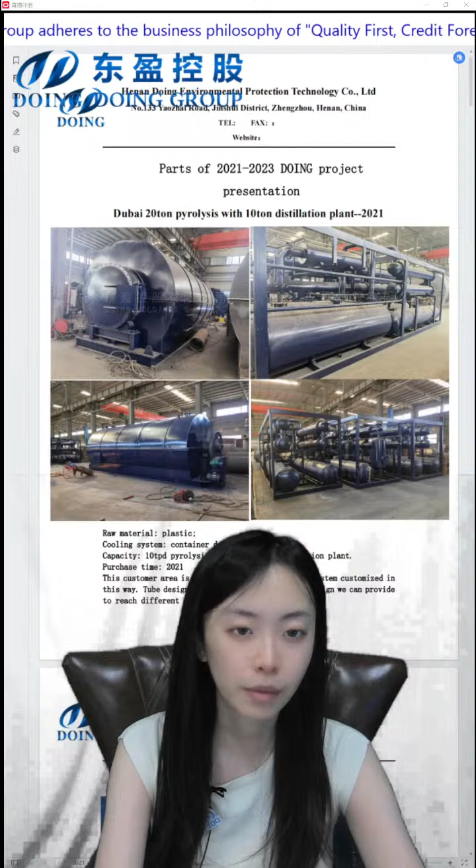The products we can get from these waste materials contain fuel oil, carbon black, or coal powder, aluminium ingot—this kind of products depends on what kind of raw materials you have. For example, if you chose the waste tire, then we can get carbon black, tire fuel oil, and steel wire from it.

The oil yield is almost 40 to 45 percent. This is from the waste tire. If you have tires from cars, trucks, or OTR tires, the oil yield is very high, can reach 45%. But if you choose motorbike, bicycle, or electric bicycle car tires, then the oil yield may be 35 to 40%. This is the oil yield.

We also can get 35% carbon black, 15% steel wire, and 10% syngas—this is the product from the waste tire. If your raw material is waste plastic, then different kinds of plastic give different oil yields. If you have pure plastic like PP, PPS, then the oil yield can reach 90%. But most of this kind of plastic, we don't use to recycle fuel oil—we also use it for deep processing.

But if you chose waste, garbage, daily waste, medical waste, or construction waste, then there are many kinds of plastic in it. So the oil yield is random.

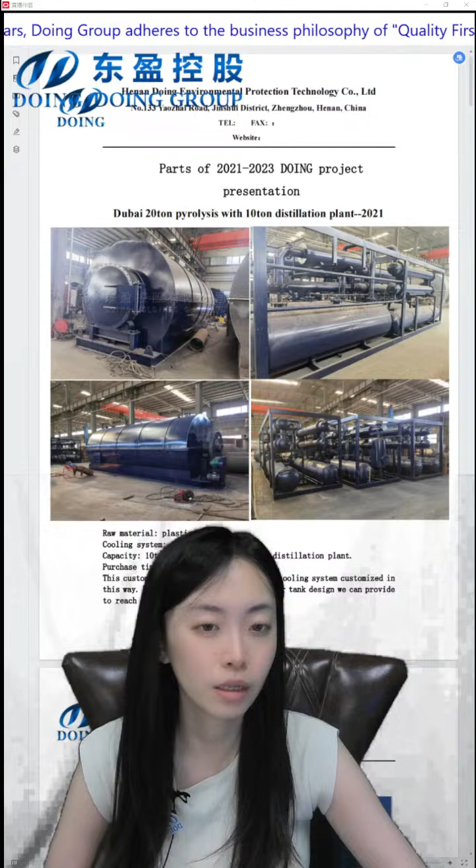About the fully continuous pyrolysis plant, the capacity, the biggest one is 50 ton. Some of our clients that have many varieties of raw material will choose the fully continuous. Another advantage is it can work without stopping for 45 to 60 days. So it has higher efficiency.

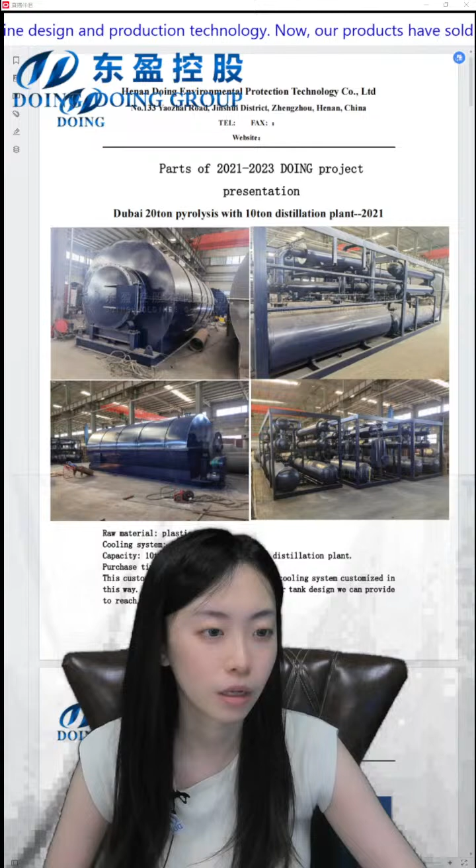It can work 24 hours. It's one of the equipment types that the Chinese government will encourage, so it's a new design this year. If you're interested, you can leave your requirements with us.

Later in this catalog, I will show you information about different customers from different places and what kind of equipment and configurations they chose. Thank you for your like. They have different raw materials, different capacity, and different requirements. Later I will show you one by one.

This shows two kinds of equipment, the batch type and the fully continuous. We also have the semi-continuous pyrolysis plant. The efficiency is between the batch type and the fully continuous. We can get 3 batches for 2 days, and the capacity is also 10 ton, 12 ton, 15 ton, 18 ton, and 20 ton. Most of our clients will choose the 18 ton or 20 ton.

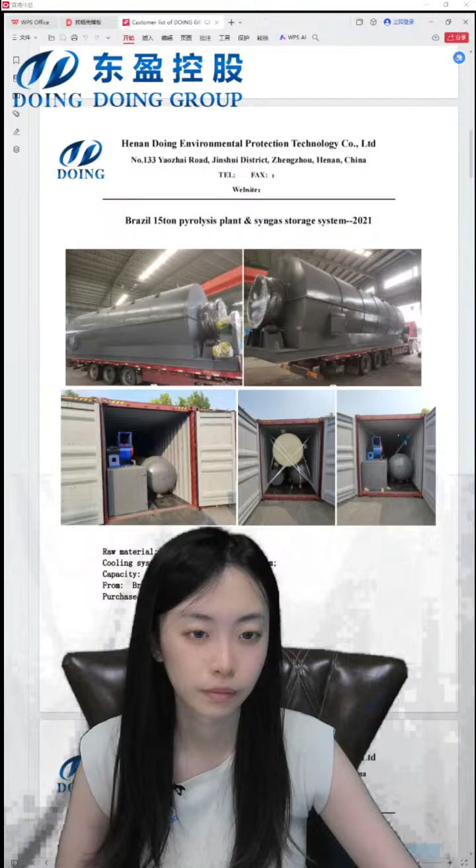This is some information about each customer, and some transaction details. We will give you transaction details, and also our catalog, certificate, and some license that we have. If you are interested, you can just contact with us.

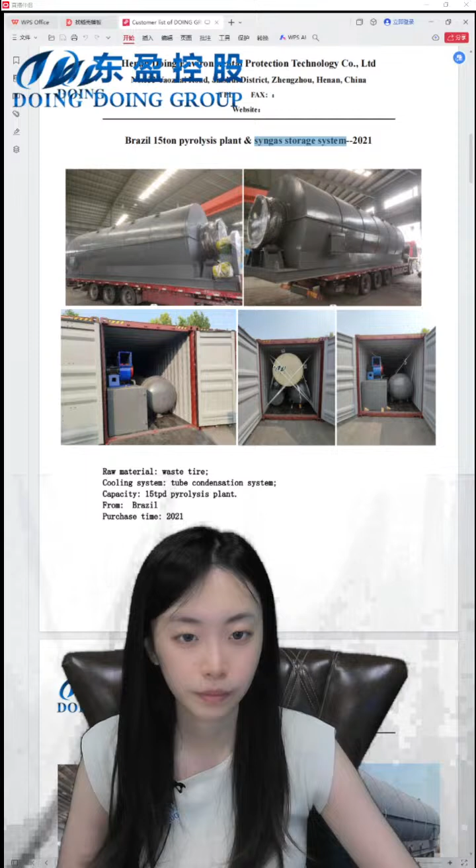This is a customer in Brazil. It shows a 15-ton pyrolysis plant, and it also has a syngas storage system. This customer's raw material is waste tire. The four products it can get are fuel oil, steel wire, carbon black, and syngas. The syngas is a heating energy, which can return to your pyrolysis reactor to heat your raw material, and you can also store it to use at other places. So these are the four products. The fuel oil we can get is 40 to 45%.

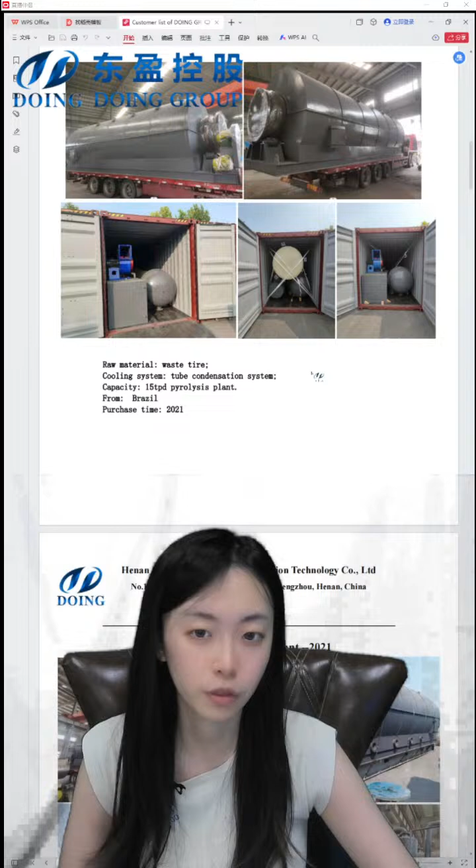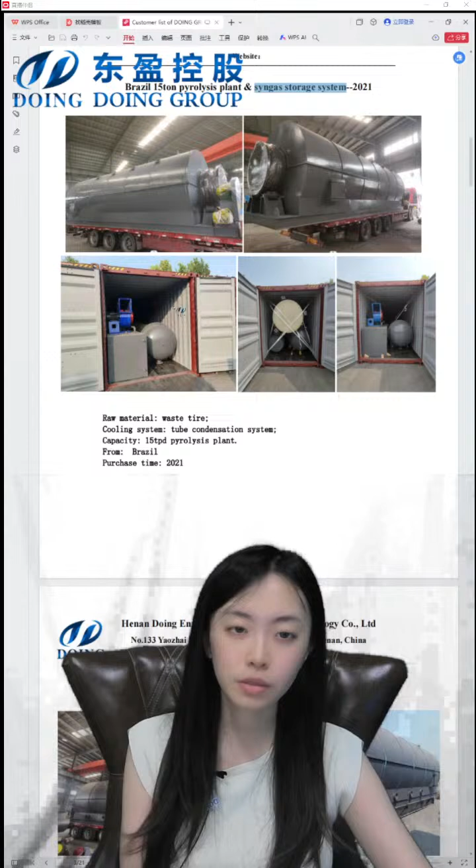The cooling system this customer chose is the tube condensation system. The tube condensation system has 7 condensers for 4 steps. Later I will show you how to condense the oil using this tube condensation system. You can see these are the condensers, the horizontal condensers. They're transported separately, but we can have our manager sent to your factory to help with installation and train your workers.

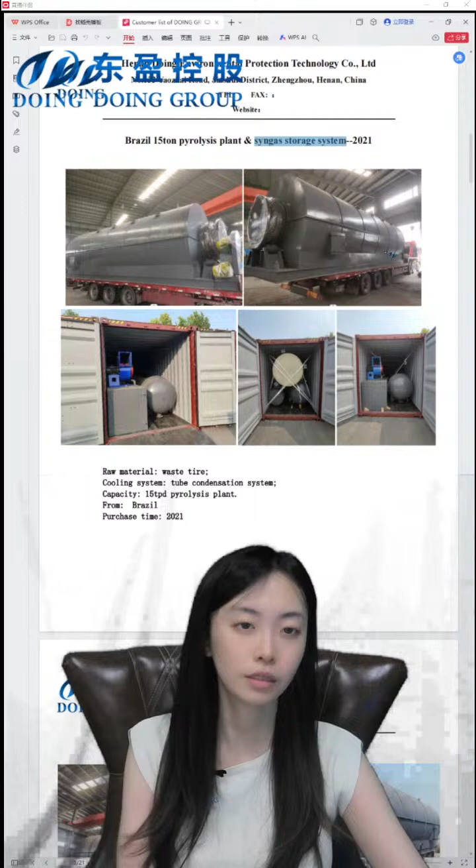This is a 15-ton batch type pyrolysis plant, and it uses side slagging. We have 3 kinds of slagging ways: front slag, side slag, and back slag. You can just give your requirements and we can design for you. They have different advantages and features.

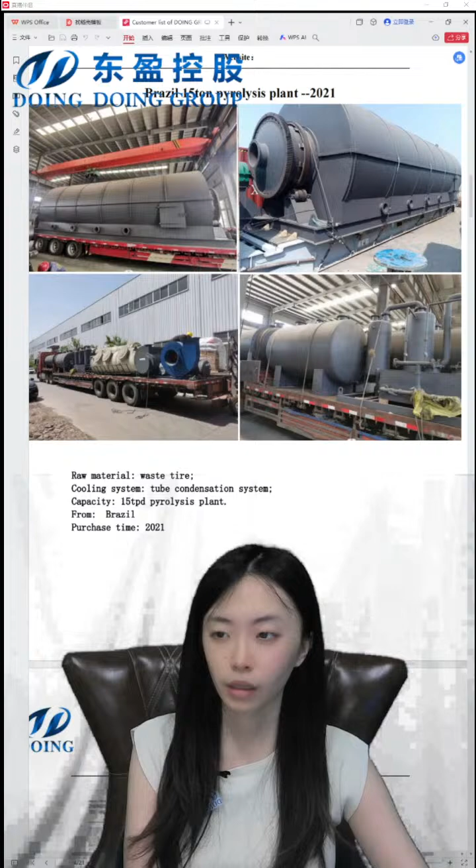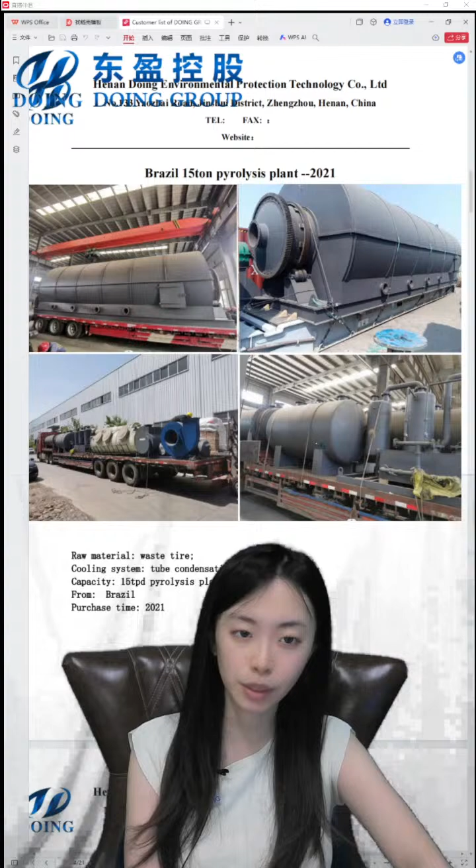Also, this is a customer in Brazil, and the raw material is also waste tire. This is the waste tire pyrolysis plant. This is the outlet - the gas will come out from here and go to the condensation system. Here is the oil tank for 2 tons to store the oil temporarily. Here is the odor removal system.

Some license information - if you want this information, you can contact with us and we will send it privately.

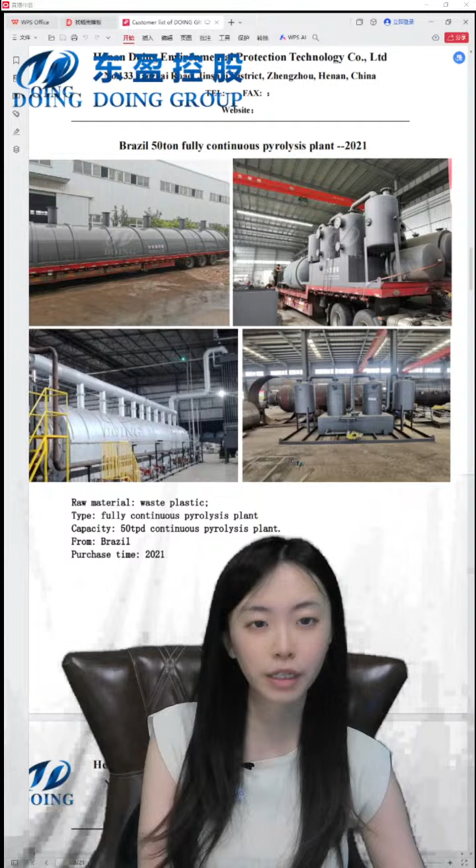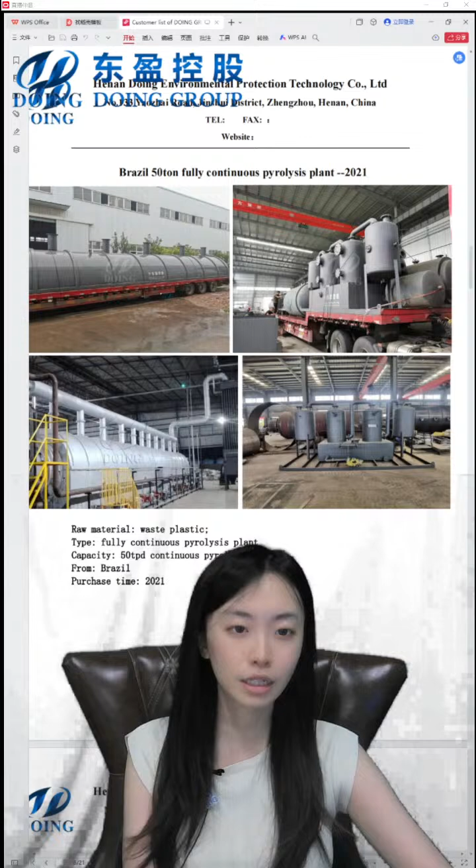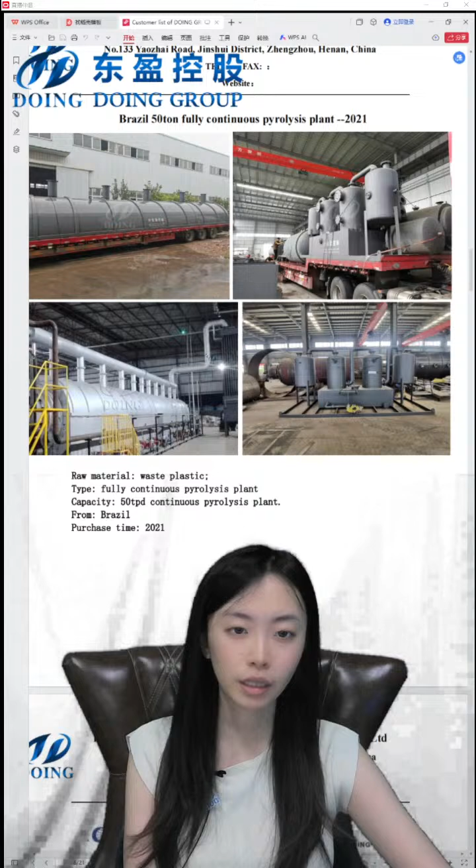And here is a customer from Brazil. It shows the 50-ton fully continuous pyrolysis plant. The fully continuous system has much higher efficiency for 50 tons, and it can work 24 hours without stopping. It can work 45 to 60 days. You can see this is an insulation cover, and here is the whole reactor. The tube is to collect the smoke, and we have this desulfurization system to purify the gas we will release.

This is the odor removal system to purify the gas - the syngas is one of the products that we can return to the reactor to burn. So if you choose the fully continuous pyrolysis plant, for the first 8 hours you need to use your heating energy like natural gas, fuel oil, or coal/wood, and for the following days you don't need other extra heating energy. You can just use the tail gas from pyrolysis to heat the raw material in the reactor.

This is a customer in Brazil, and you can also come here to visit and know more details. Here is some transaction license information.

Okay, we can have some 3D videos for you to give you more information. Later, I will show you about the fully continuous pyrolysis plant.

Hi sir, I don't understand you very clearly. What kind of equipment that you want to know?

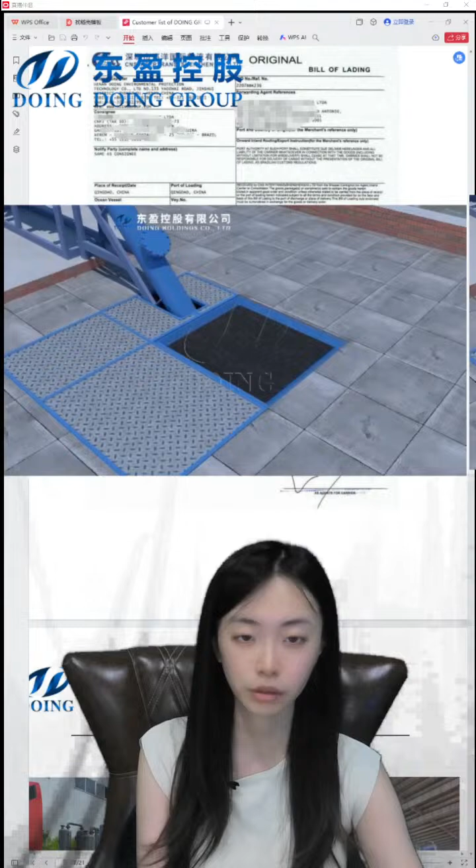Okay, let's start from here. The feeding raw material we need depends on your material: if it's waste tire, we need tire rubber powder; if it's plastic, we need plastic particles. The feeding system is different between the batch type. Here is the feeding, we have the underground storage of the feeding system, and this is a feeding winch.

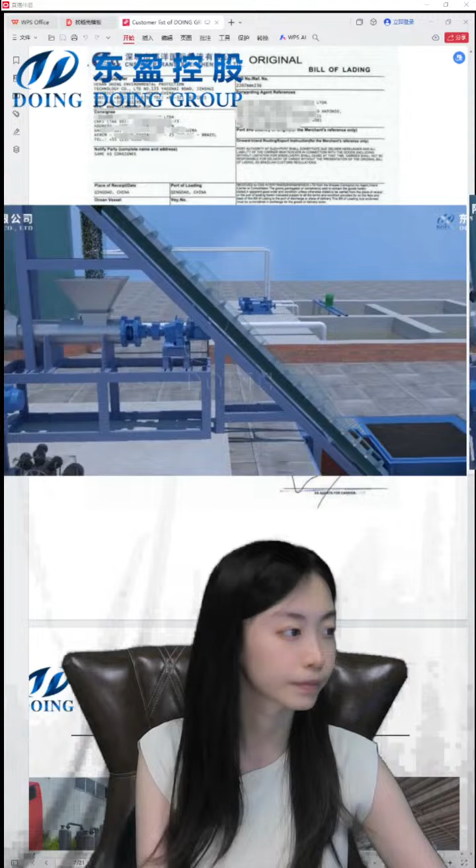We just need to have a pre-process. You can have a pre-process workshop, but you can also just buy the tire rubber powder directly.

Here is a furnace, we use this hot wind furnace. The heating way used is the burner. We have 8 burners and 10 tail gas burners, but now this hot wind furnace is much more even to get the heat.

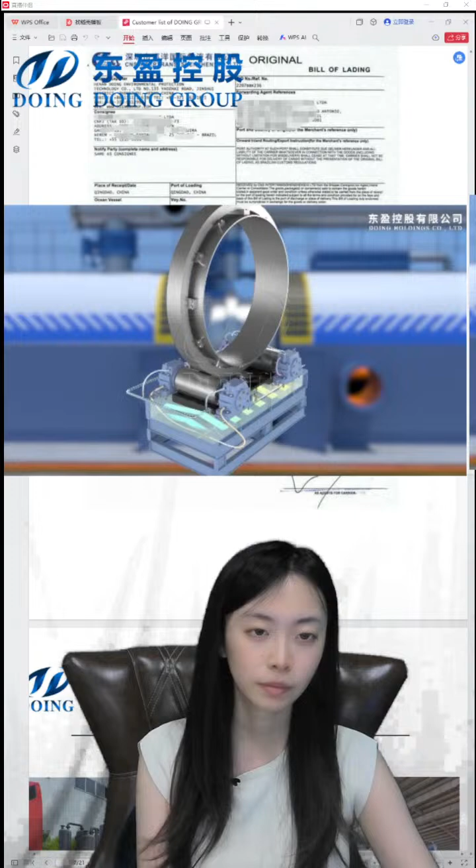Here's a ring, the high temperature resistant ring between these two sections of the reactor. Because the reactor is much longer than the batch type, if you have a 50 ton reactor it's 26 meters, so we have a ring in the middle of it.

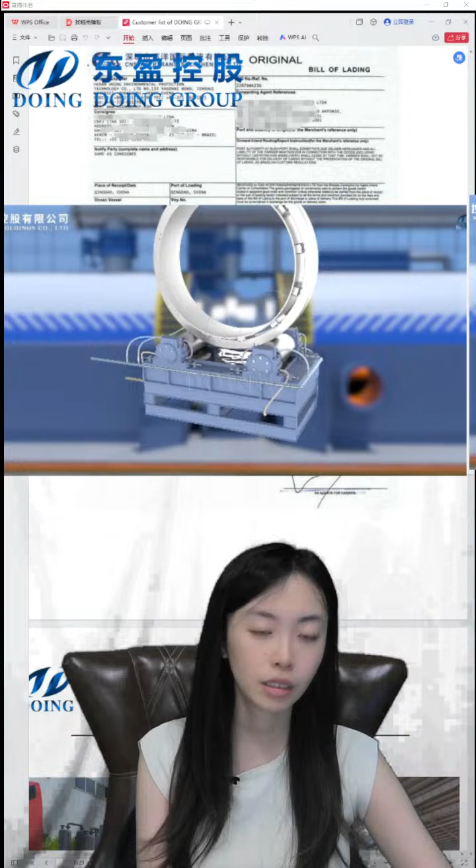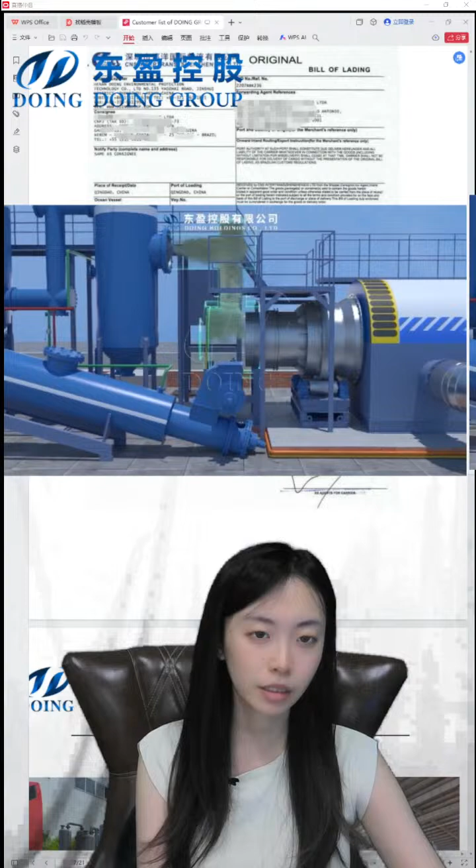This shows us the lubricate and cooling water. Here is the outlet, the flue gas will come out from here, and the carbon black will discharge.

Let's talk about the flue gas first. The flue gas will first come to the buffer tank. It has two effects: the first is to slow down the speed of the gas, and second is to settle down the carbon black.

Then it will reach the cooling buffer tank. It has the same effect as the buffer tank, but it can also cool down the flue gas, and it will be temporarily stored into the storage.

We use the U-tube to prevent the gas release.

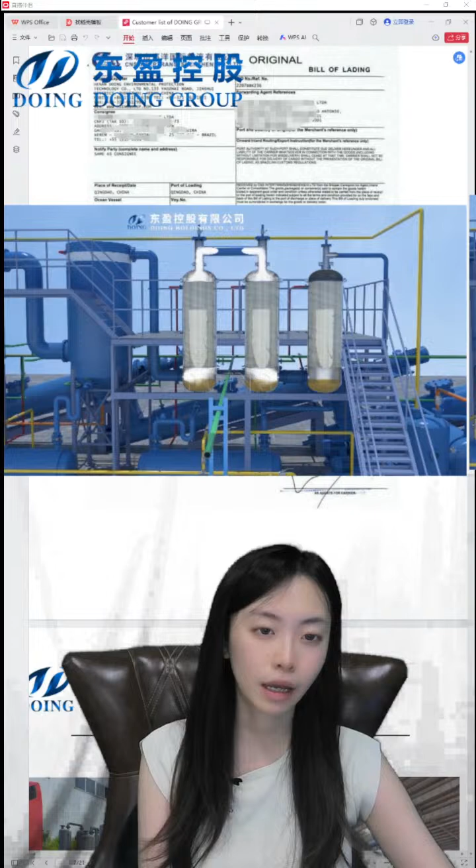Then we have 3 cooling condensers, or cooling buffer tank, and 3 condensers. This is a vertical condenser that each has 37 tubes. It will sort out the gas, and we have requirements.

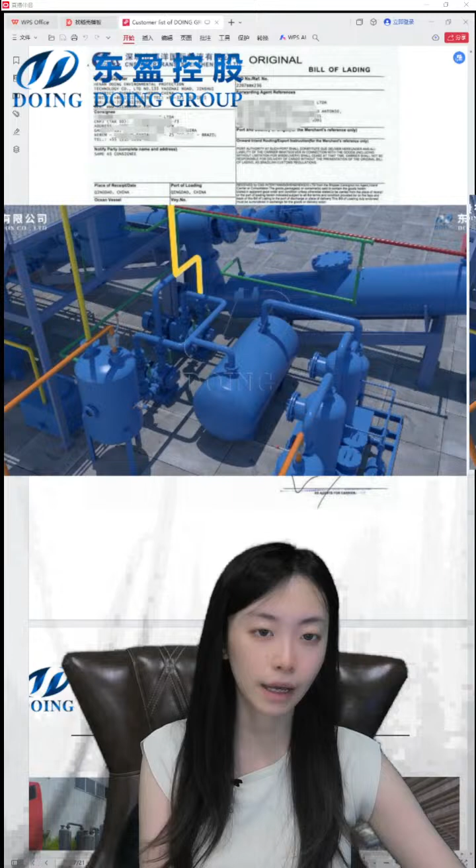So we have attached the cooling water, then we can cool down the gas to the oil. This is the pressure, the negative pressure device, to ensure all the gas will come to the condensation system and the odor removal system.

Here is the odor removal system, which is one of the patents in our company. Just the tail gas, if we burn it directly, it will have some bad smell, so we have used the odor removal system to purify the sodium hydroxide. Then the tail gas converts to the burner to burn the reactor.

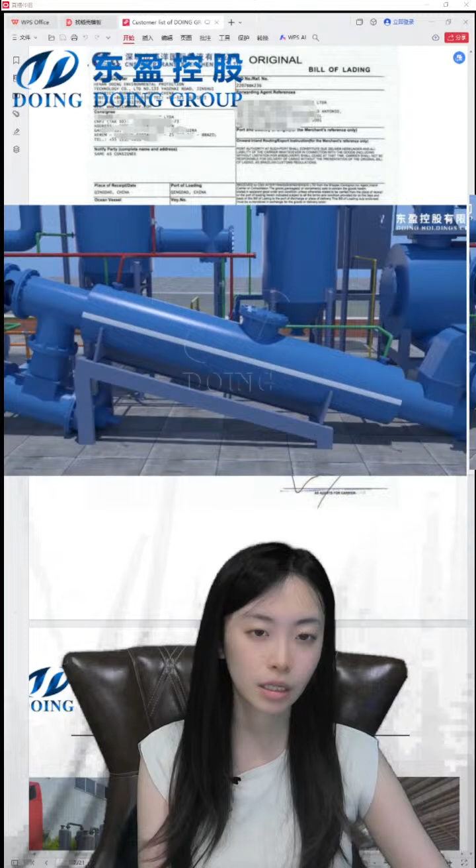Now this shows us the discharging system. We discharge the carbon black at a very high temperature using this slagging winch. Outside it is cooling water to cool down the carbon black, then we can just pack it at normal temperature.

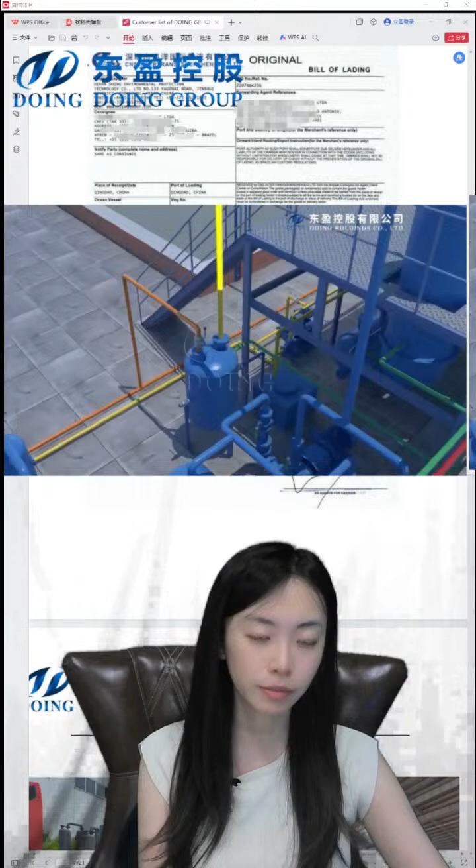This is a pressure monitor, and we have a temperature monitor to ensure this product is in a safe environment. This is the water seal to prevent the release. We also have other devices like the vacuum device to prevent sudden explosion, and an alarm bell and other devices to ensure safety in production.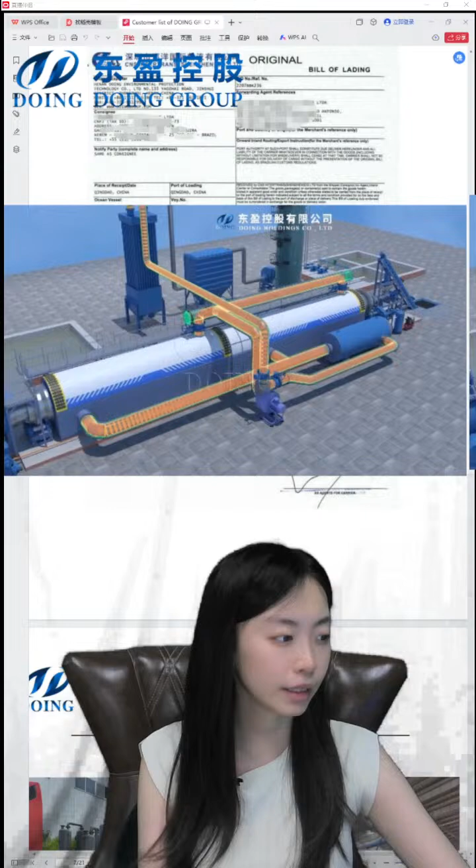So this is the other removal system, the purification system to purify the gas that we are going to release.

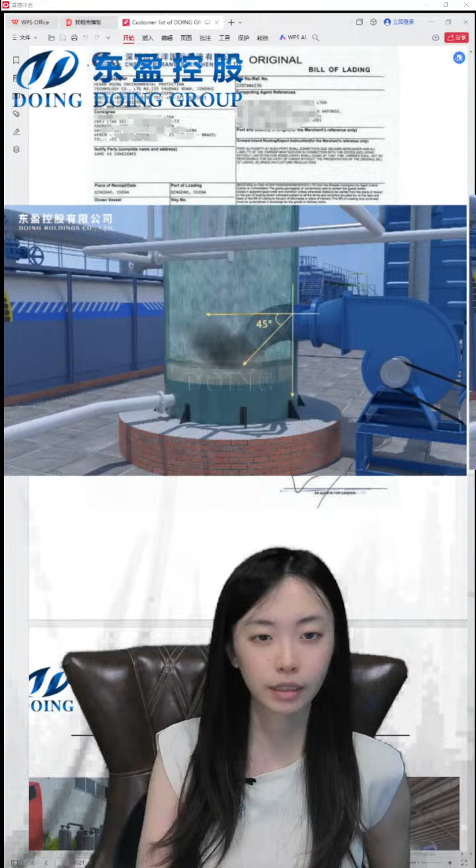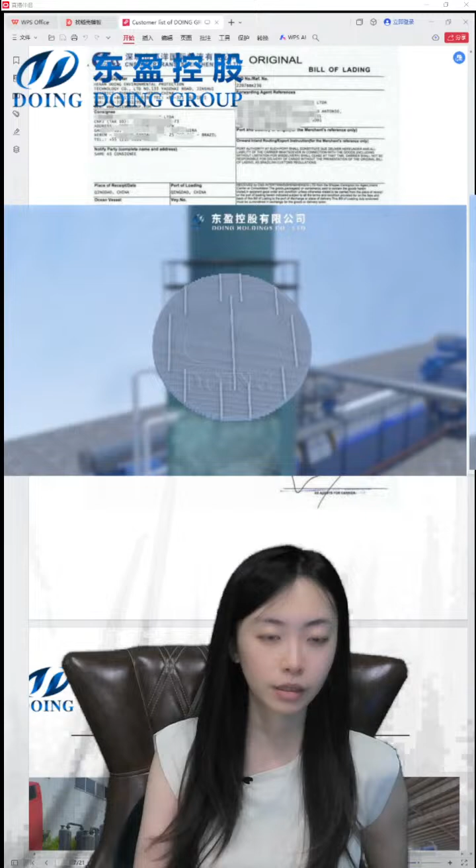The first step is to cool down the gas to a normal temperature, and we use this cyclone device. And this is the glass fiber, we can use it to purify, for example, the sulfur dioxide and other bad smoke in it. This is to absorb the water in the gas.

This is the whole production, and the last step is to pump the oil into the oil temporary tank, and collect it in a bigger tank. Then the oil can be used at the cement factory, glass factory, or other kinds of places as heating energy.

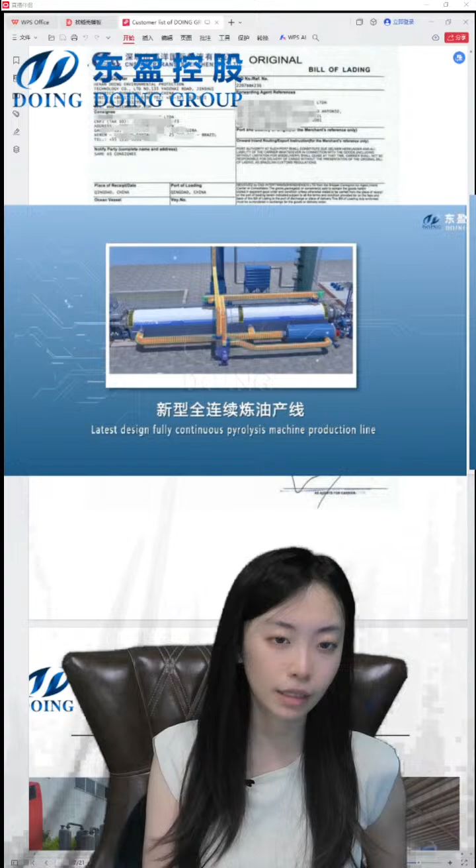And if you want to refine it, we can also get the diesel from the pyrolysis fuel oil. Then the diesel can be used in agricultural machines, mining machines, or ferry ships, and this kind of places. If you are interested, you can just contact with us.

Okay, then let's just go on about this catalog of our client.

Here is a customer in Ghana. They have two kinds of raw material, tire and plastic. If you have two or more kinds of raw material, it's better to choose the batch type pyrolysis plant. It can use one kind of equipment, but there are different devices, like the decogging device when we have plastic, or the feeding device. It also can use the auger feeder.

The temperature is different between plastic and tire when we do pyrolysis. So it's better for you to put only plastic in one batch, and tire in another batch, to give different temperatures, because the tire's heating temperature is much higher than the waste plastic. This is a batch type, and the capacity is 12 tons per day.

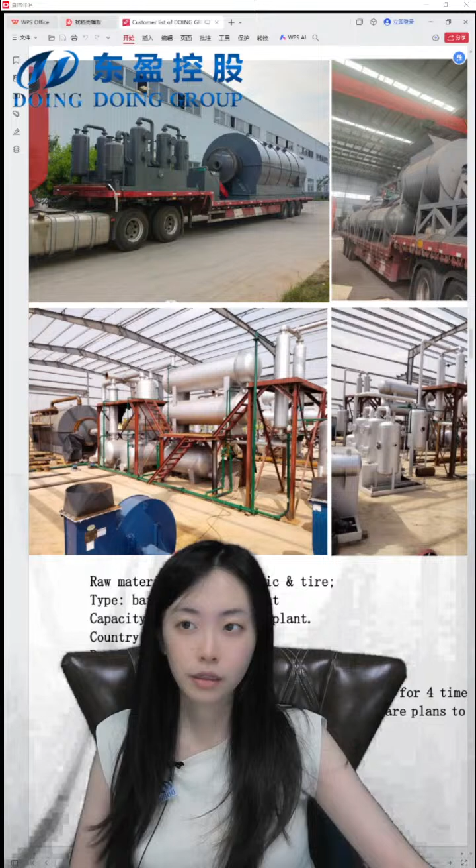This is the condensers. The tube condensers are clearer, you can have a look. It has 4 steps. The first step is 2 vertical condensers, each with 4 tubes in it. The second is the oil water separator, which is not only a condenser but also a purify system and a safety device. Then this is the horizontal condenser, which has the biggest efficiency for cooling. And this is the last step, 2 vertical condensers, which ensures all the oil is condensed.

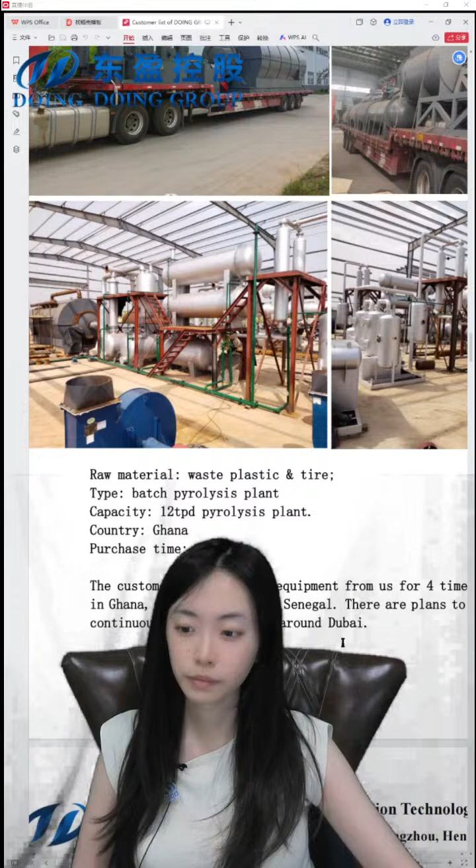Okay, let's go on. This is from Ghana, and these customers have purchased equipment from us 4 times, in different countries, different areas, Ghana and Senegal and other countries. If you want to communicate with our clients, it's all welcome, and you can come to their factory. You can just contact us.

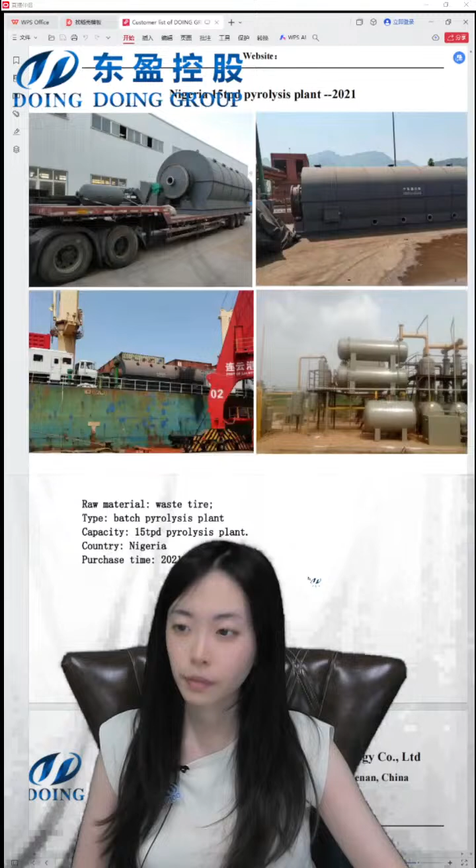And this is Nigeria. We have our subsidiary in Nigeria, our branch company, so it's very convenient to do business here to buy the equipment. It's very convenient.

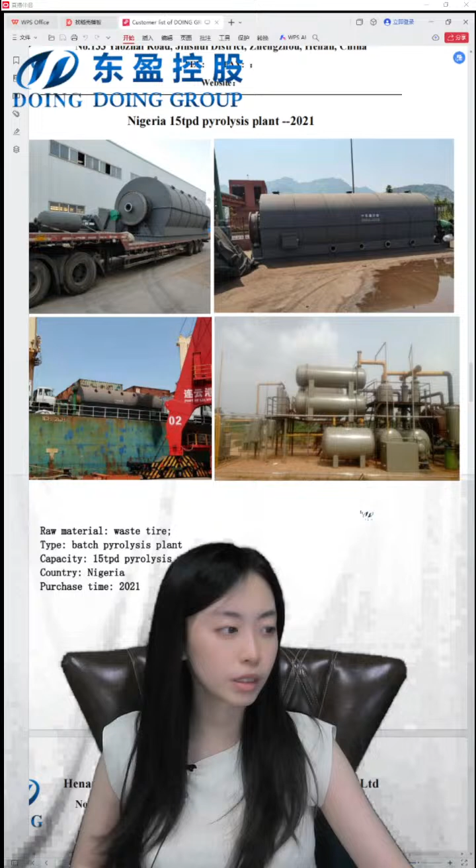This is the waste tire. The raw material is waste tire, and it shows also the batch type pyrolysis plant. It's 15 tons per day. Now you can see most of our clients will choose the 15 tons.

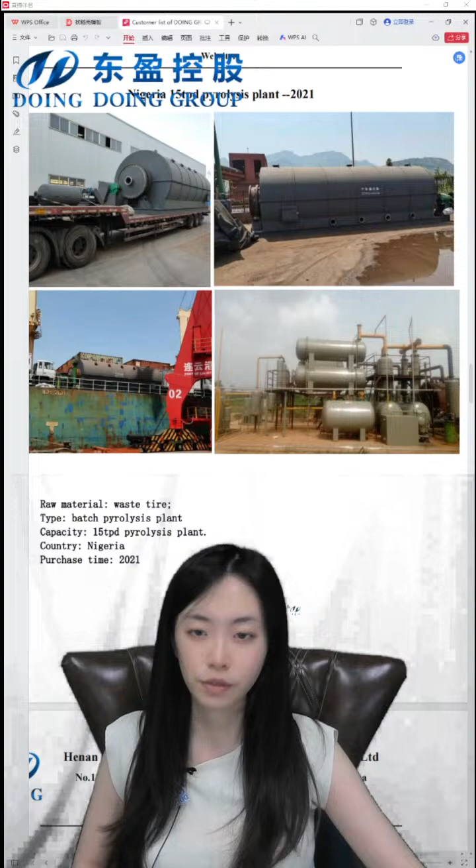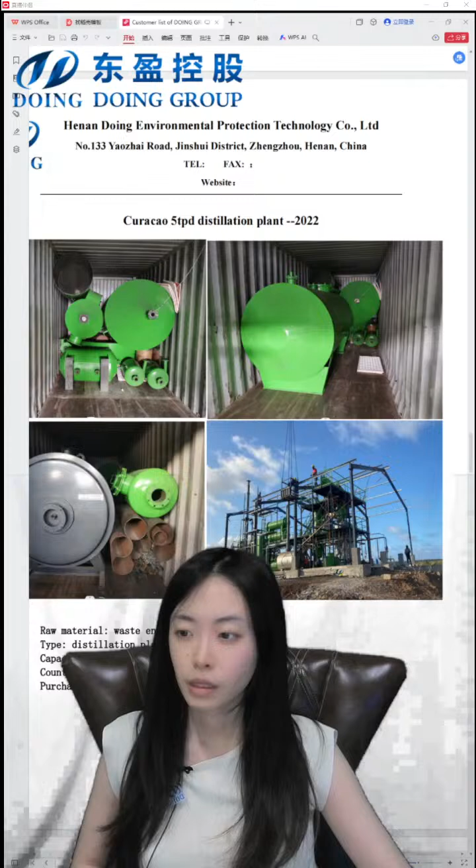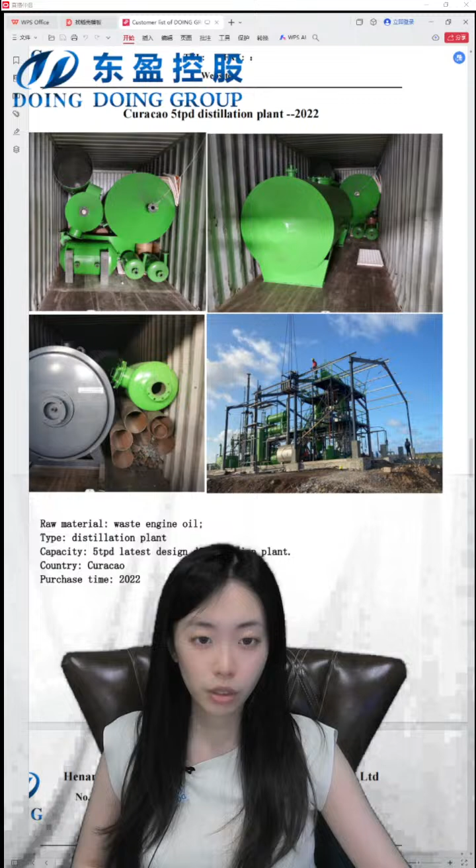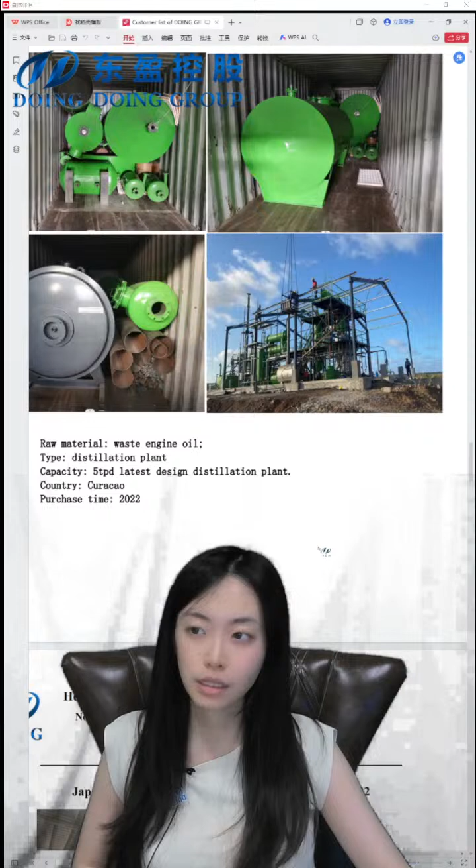And this customer bought a 5 tons per day distillation plant. The distillation raw material can be waste engine oil or the fuel oil that we just pyrolysed. If you're interested, we can also provide this kind of equipment. We can get diesel from the engine oil or other waste oil.

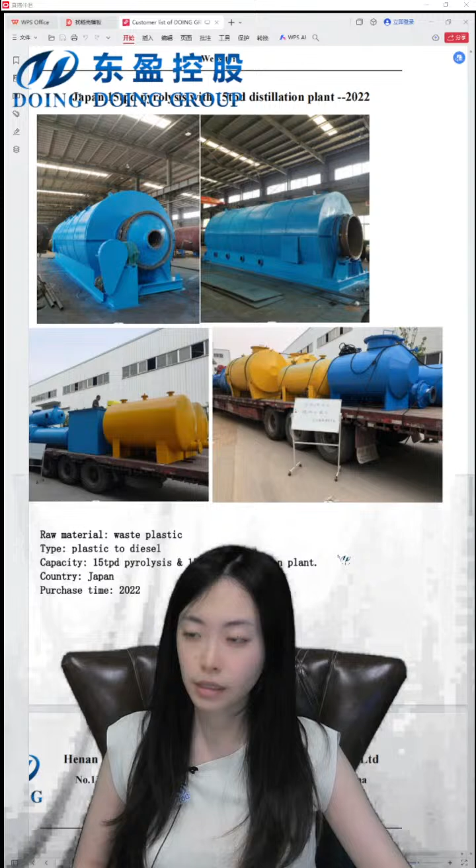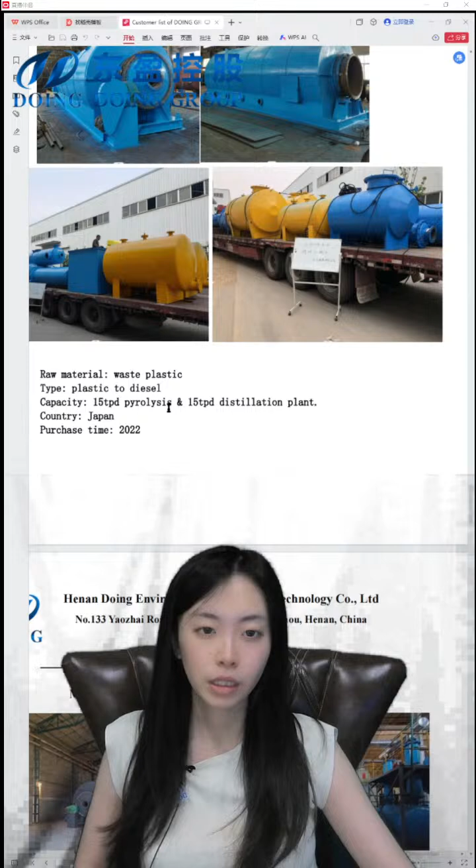Here is the Japan customer, the raw material is plastic. The type is plastic to diesel, also called the distillation equipment. It has 15 tons of the pyrolysis plant and 15 tons of the distillation plant.

The solid waste business requires a solid waste license to operate in China. We also have hazardous waste, which needs a hazardous waste license and more strict policies.

Okay, and the feedback from customers is that they can not only get fuel oil, but also get some subsidies, because some governments give subsidies and processing fees for this recycle project of value. For example, if you chose hazardous waste, we can't just throw this oil away randomly. So we need to put it through a processing hazardous waste company that has this kind of license, so we can get some subsidy fee, a processing fee.

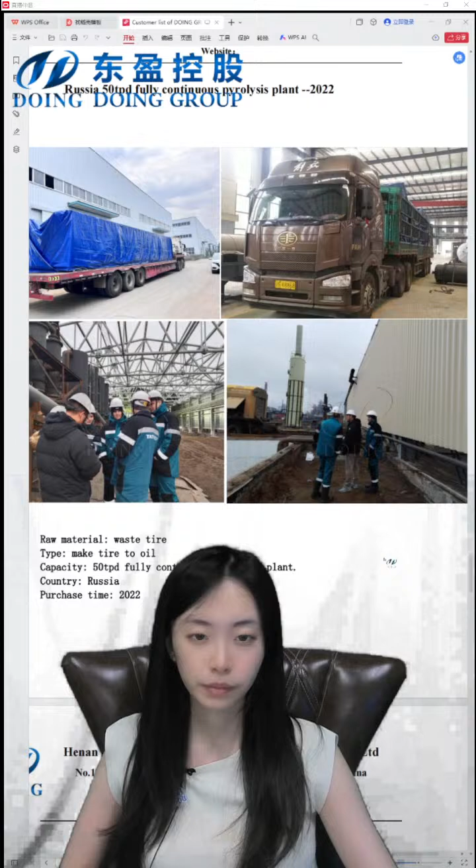And this is a customer in Russia. This customer bought the fully continuous pyrolysis plant, which has much higher efficiency, and because Russia's temperature is lower than other places, the condensation system efficiency is much higher.

You can see it needs to get the oil from waste tire. For the fully continuous pyrolysis plant, if your raw material is waste tire, we need a pre-process to turn the whole tire into rubber powder. We need to crush it and use magnetic separators to separate the steel wire from it. This is the customer in Russia.

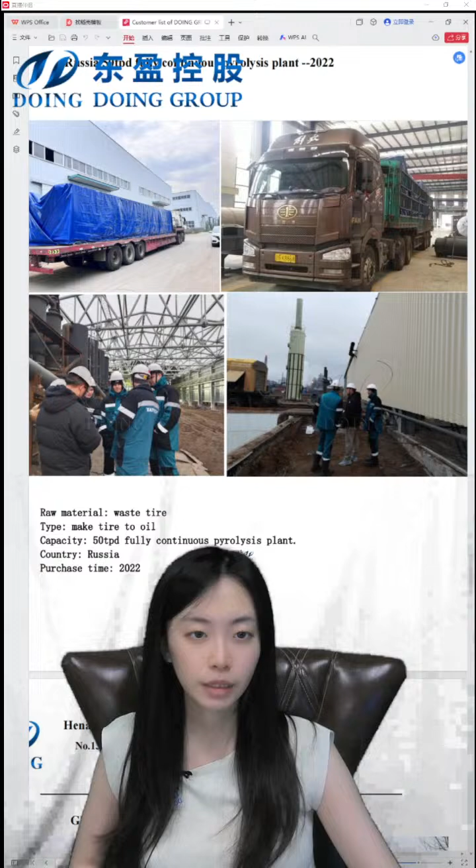And it's Ghana. We have many customers in Ghana, and many customers in Africa, because the environmental policy is not as strict as, for example, in China. It's also waste tire equipment, and they want to get diesel, so they have both the pyrolysis and the distillation plant.

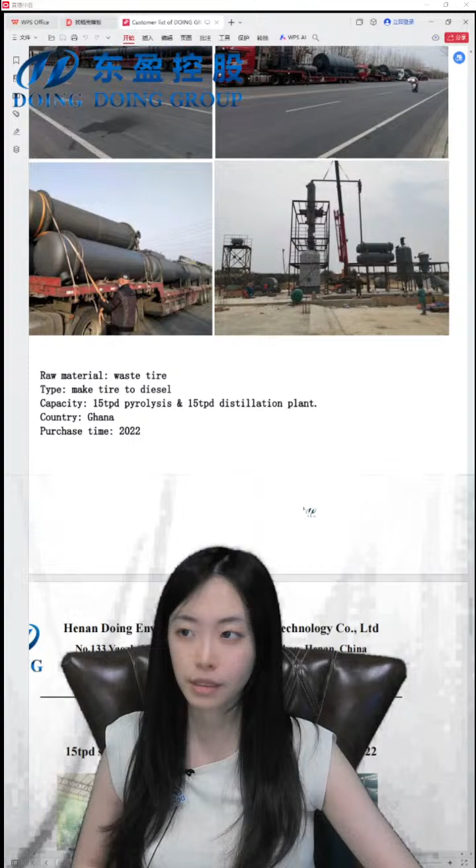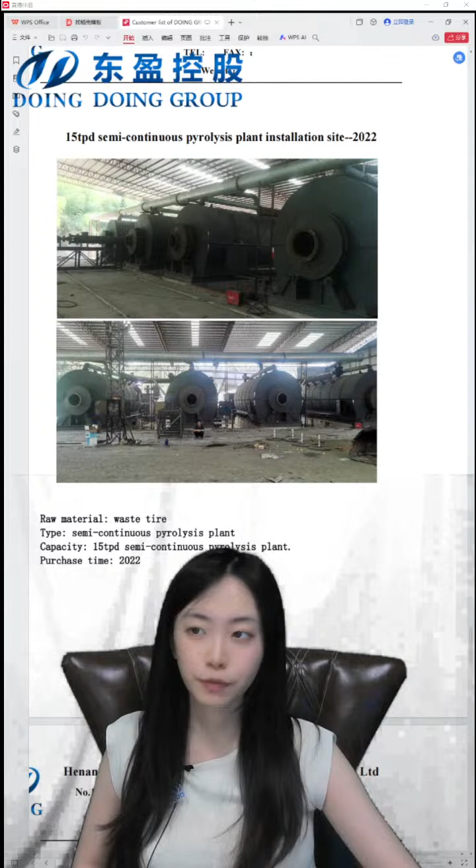Here is the semi-continuous pyrolysis plant. It's different - the efficiency means we can get 3 batches per 2 days. The difference from batch type is it can discharge the carbon black at a high temperature, so we don't need to waste time cooling the reactor and slagging the carbon black. It's much higher efficiency, and most clients these days choose the semi-continuous.

The capacity is also 10 ton, 12 ton, 15 ton, 18 ton, 20 ton. This customer chose 15 ton for 4 lines, so it can process almost 60 ton of rubber powder. The raw material also needs to be processed into rubber powder.

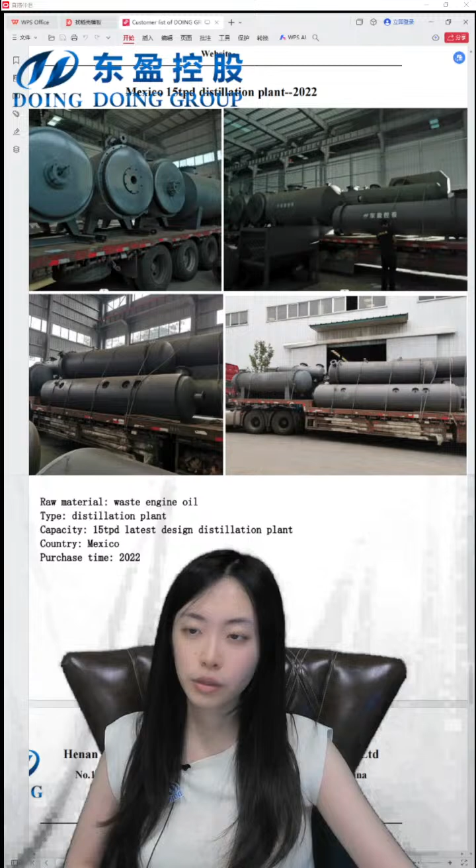This is a customer in Mexico. Here are the condensers, the tank, and some oil storage. The raw material is engine oil, and they want to get diesel. This is also some delivery pictures - we will give you some delivery and installation pictures.

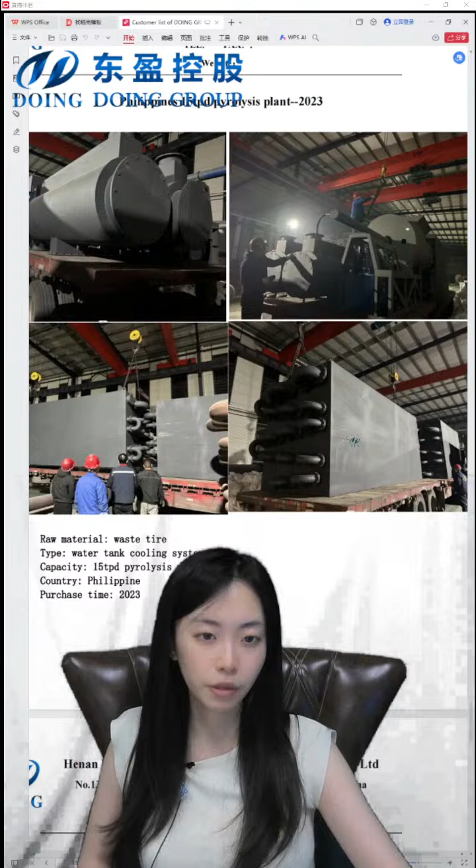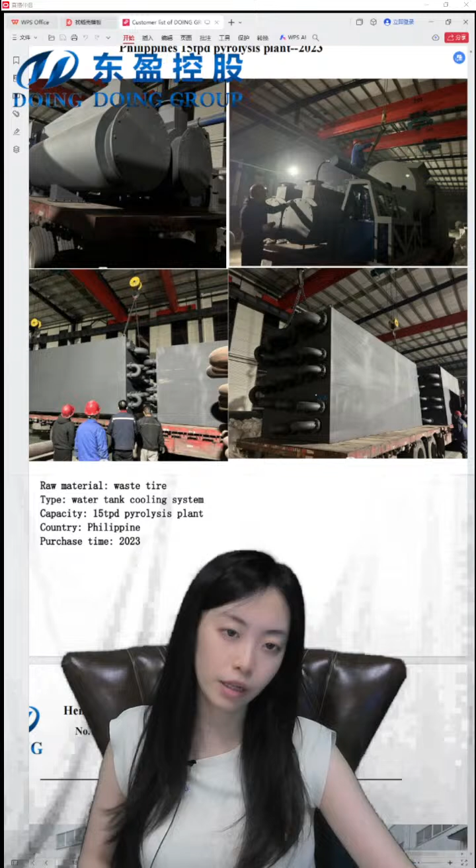Here is the Philippines 15-ton pyrolysis plant, and the raw material is waste tire. As you can see, the condensation system is different from the picture shown before - this is a water tank. It's also a condenser that can have very high efficiency, just different. It's much easier for installation than the tube condensers.

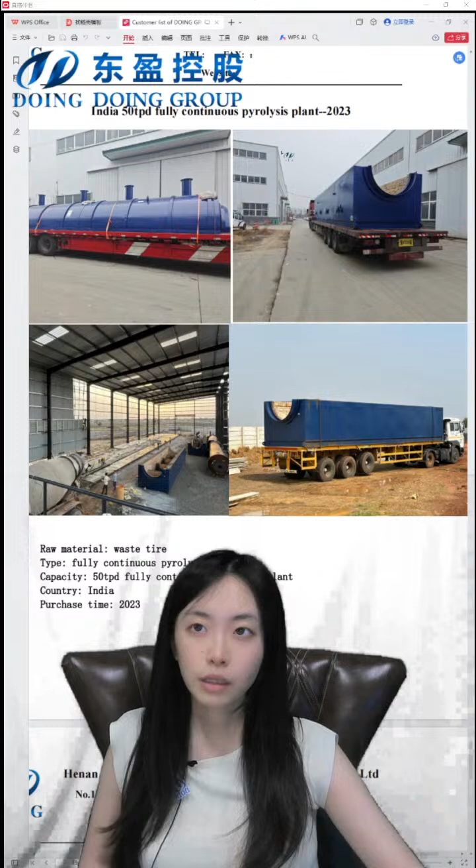You can see this is the installation cover, and it has two pieces. We will build it as one, then cut it, then put the furnace in it.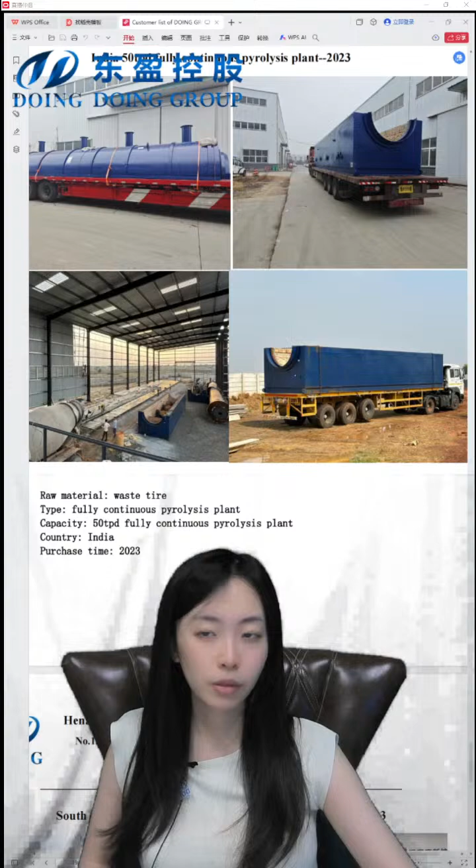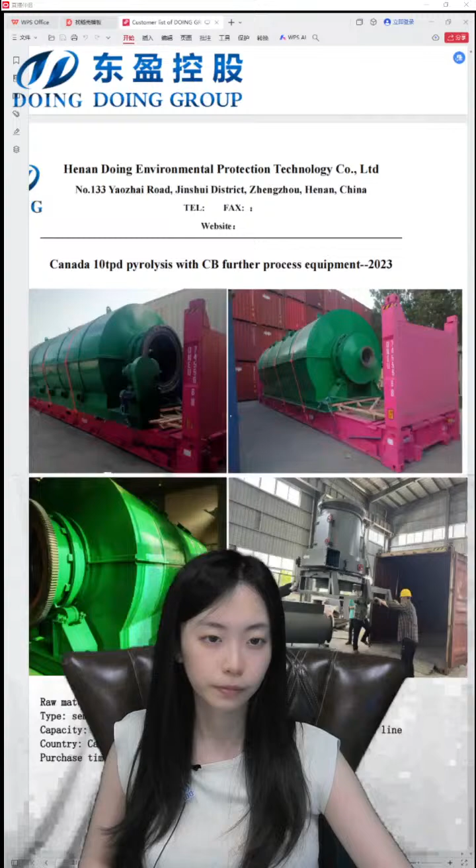Here are some pictures of our sales manager and our clients - this is in our company, and here is in our factory. It shows the raw material of waste tire, and it's going to get the diesel. This is the last picture.

A client from Canada - you can see this is different, the raw material is different. It's hidden behind me. The raw material is oil sludge, you can see it. This customer's raw material is oil sludge.

Most raw material of oil sludge will choose the batch type pyrolysis plant, and the feeding way is always the oil pump or transmission belt, because of the different states of the oil sludge. The liquid and solid oil sludge have kind of different feeding ways. If you have liquid oil sludge, then we can also use the fully continuous pyrolysis for this production.

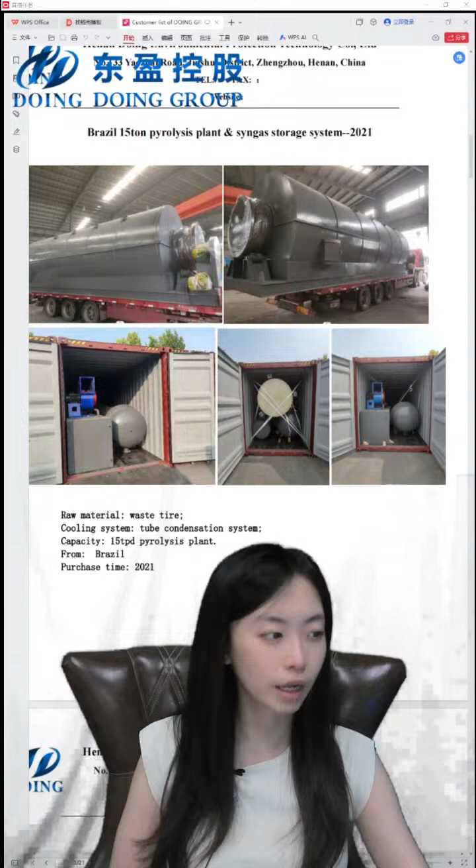These are some pictures of delivery, and also delivery. Later I will show you some pictures after installation, and of them in production.

You can see this is the raw material of the waste whole tire. This customer chose the fully continuous pyrolysis plant, so we need to process it into rubber powder. We need to first cut it into circles and then crush it into smaller pieces.

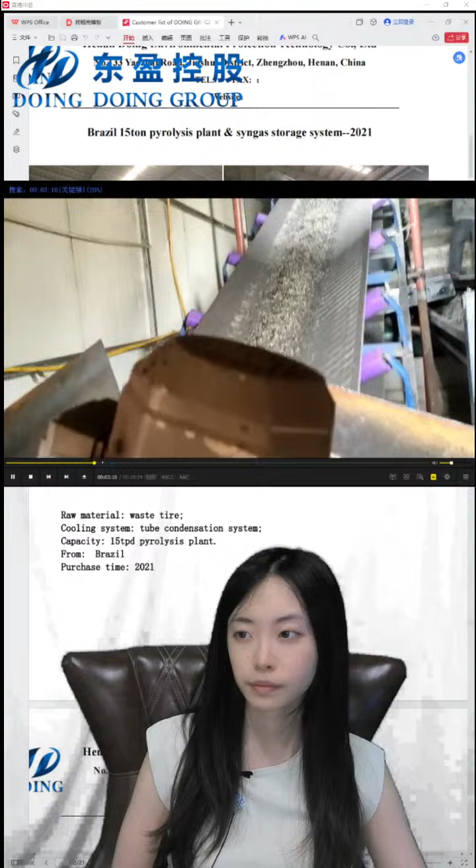This is rubber powder with steel wire, and then we need a magnetic device to separate the steel wire from the rubber powder. This is a magnetic device. It's not working now.

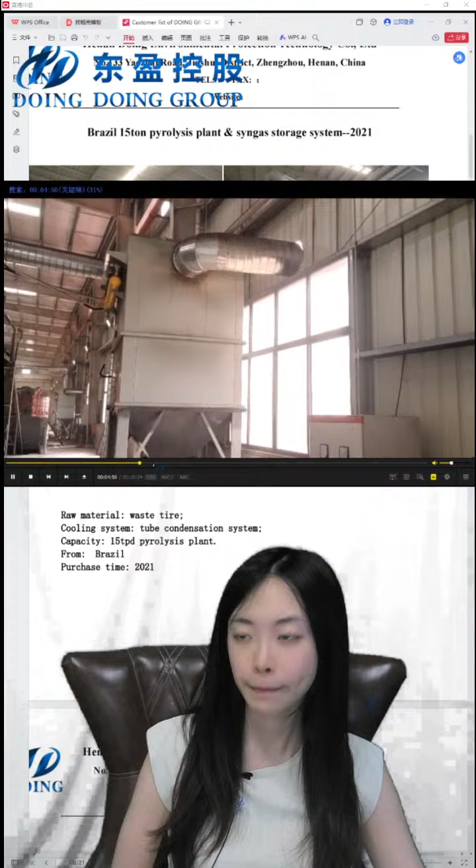Here is the transportation system of the rubber powder. You can see it's all sealed because there may be some dust when we use the carbon black or the rubber powder. So we use a sealed device, so there's no dust pollution of the rubber powder and carbon black. You can see the environment of the production plant has good quality.

For this customer, outside is an insulation cover. Inside is a furnace.

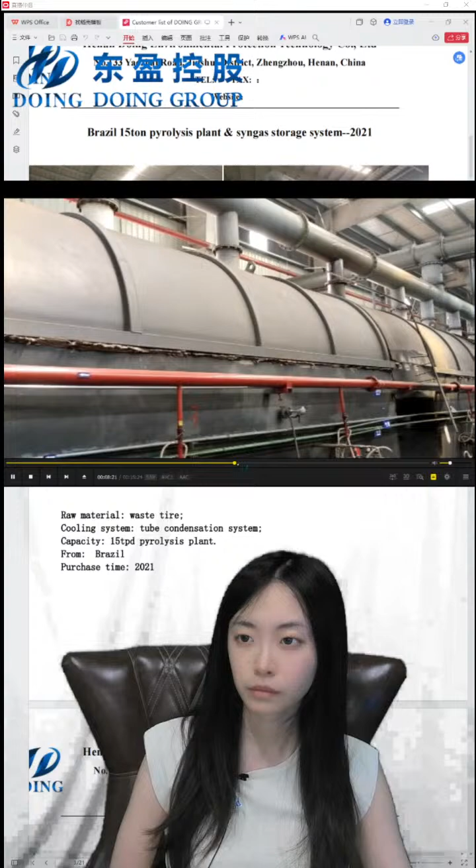It is 26 meters, so in the middle of it there is a temperature resistant tube. Up, there are 2 sections of the reactor. And the back of it is the condensation system and the discharging system.

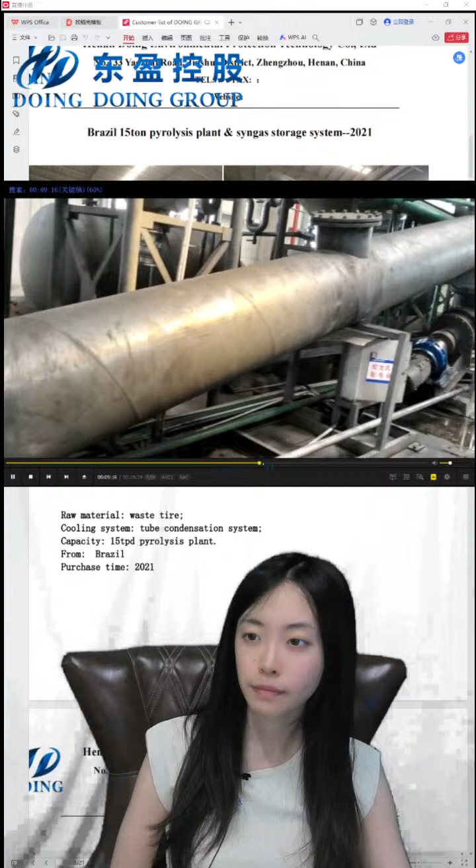This is a slagging winch. We can ensure it feeds and heats the raw material and slags the carbon black at the same time. So we can use side slag, front slag, back slag - sorry, we have 3 kinds of slag. We can choose the back slag to discharge the carbon black and use the slagging winch that has a water cover outside to cool down and lower the temperature.

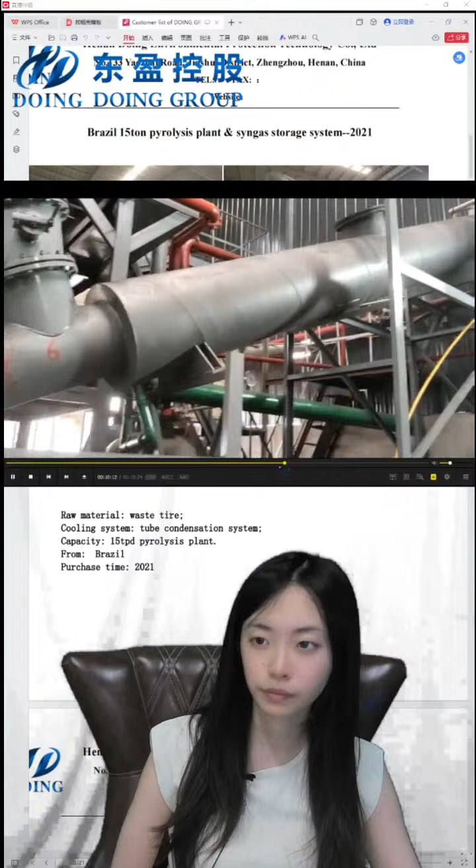Here is the oil tank. You can see in this window the oil we can get - quality is very high. This is oil. Also the oil.

Here is where we pack the carbon black. In this step, we need 1 worker. You can see a fully continuous pyrolysis plant is much more automatic, using the PLC system, so it's much more labor saving. We don't see any workers in the pyrolysis or discharging system.

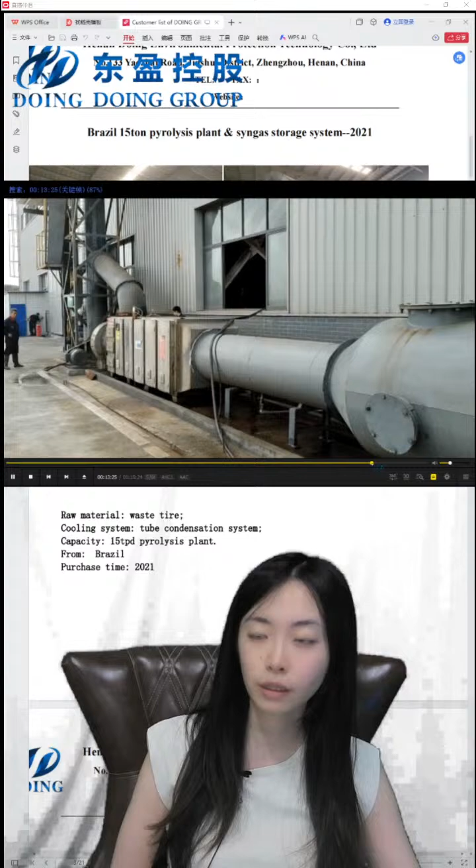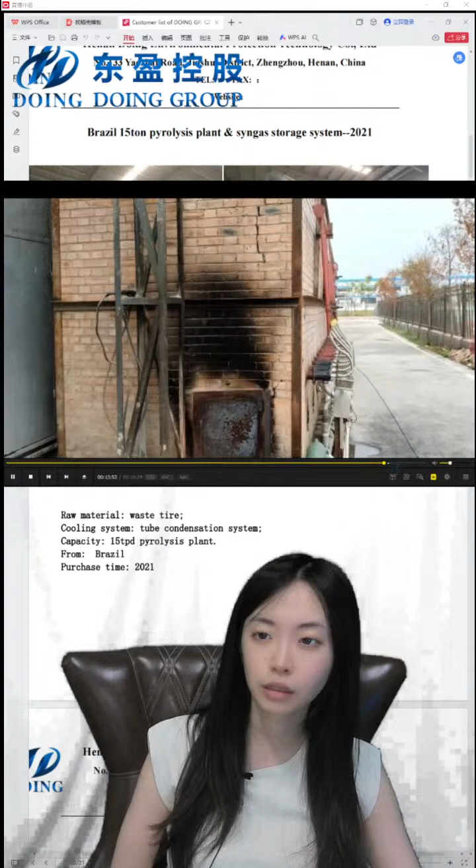Here is a cooling system and condensation purification system to purify the gas that we will release. This is the burner chamber to burn the syngas that is released.

Here is the oil tank, and here is the water tank - a water pool. The condensation system's water comes from here. We use the water pump to pump it, and this is a cooling tower to lower the temperature.

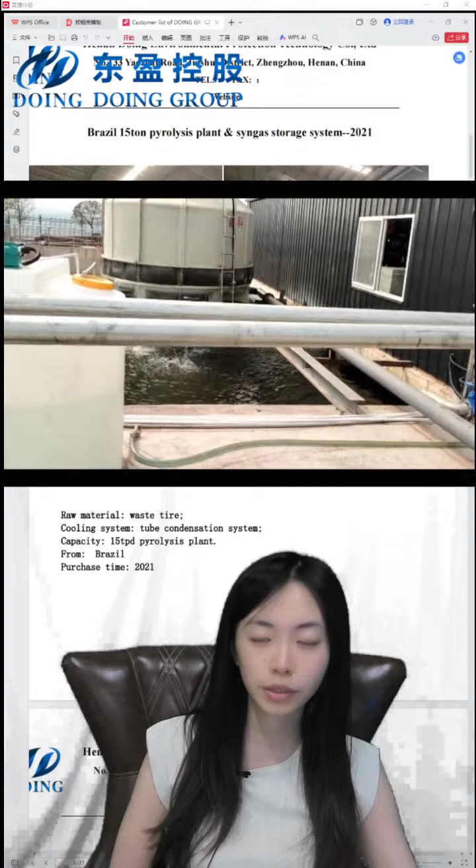Here is a whole line of the fully continuous pyrolysis plant. The capacity is 15 ton, the biggest is 50 ton, and we can also have 15 ton, 20 ton, 30 ton, 40 ton fully continuous plants. It's a new design of these years.